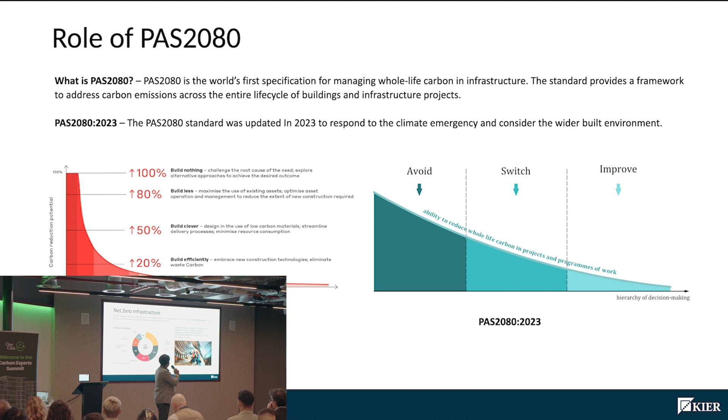If we move on to the next slide then - if we take the UK context, 75% of UK emissions are predominantly from the infrastructure sector: the roads we have, the power industry, the buildings in the country. So it's really a key sector where we need to reduce emissions, and also investment.

Nothing can be achieved without investment. A recent study found out that at least 40 billion pounds need to be invested per year into the sector for the country to achieve its 2050 net zero target, if it were to achieve it.

So that's the problem. The problem is to reduce carbon, and for that we need to achieve net zero. Infrastructure plays a key role in the UK achieving net zero and the whole world achieving net zero. So we need to achieve that.

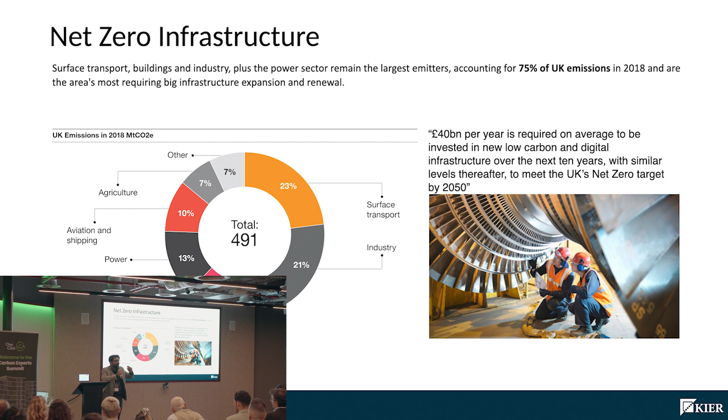Another way to think about it is we are unhealthy, we are overweight - not us, we all look beautiful here, but using a weird analogy, the whole world is unhealthy. It's overweight. There's too much carbon there, or if I were to refer to that analogy, there's too much fat in it. So how could we reduce that?

If it were us to reduce fat, to decrease weight, we go on a diet. And for the world, they need to be doing this sort of thing. Now this is a non-exhaustive list - there are unlimited solutions we could be doing, but I've just picked out a few which, at least in my mind, are significant. So: clear targets.

I generally find it very hard to drive thinking within infrastructure projects to reduce emissions or introduce sustainable solutions, because every time you go in there with an innovative product or design, the question you get back is, why waste the time, why waste the money, why waste the effort, if it's not for an actual cause.

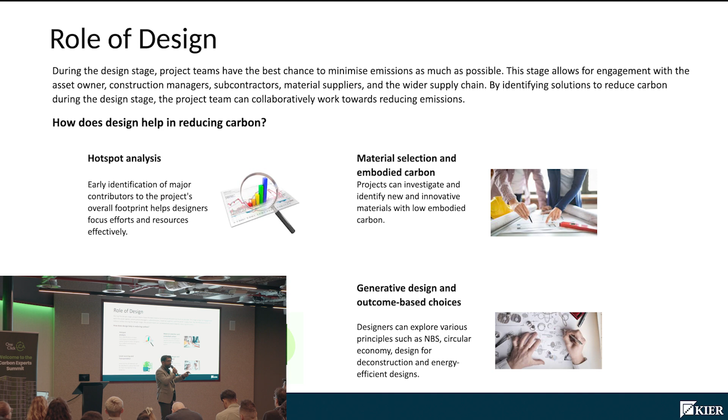Then moving on to identify other sources, so local sources and alternative sources of transportation. I recently worked on a HS2 scheme—well, I say recently, that was last year. Now, we required a lot of aggregates to be brought on site for that project. So initially, the early designers identified a quarry about 60 kilometers away. But during detailed design, we somehow managed to find a local supplier, which was just about 10 kilometers away from where we required it. Now that change from 60 to 10 kilometers saved about 10,000 tons of carbon. So that's one of the biggest impacts we could have in design, where we are able to identify these local sources of materials, which significantly reduce that A1 to A5 element of carbon.

Then generative design, which was talked about earlier by my colleagues. We could look into applying a lot of different principles, integrating nature-based solutions, applying circular economy, designing for deconstruction, where we get to look at different stages.

So life cycle assessment in design—the main benefit, as I see it, is we get to see the impacts across the whole life cycle of the project. So if I were to choose a material, I could look at what impact it will create during maintenance of that material, and what impact it will have during the end of its life. Traditionally, what I found with low carbon materials is that we found a material with very low embodied carbon. It's a great product, will solve all our problems, it comes from a local place, so it's pretty much low A1 to A4. However, it requires a lot of maintenance because it hasn't been tested properly.

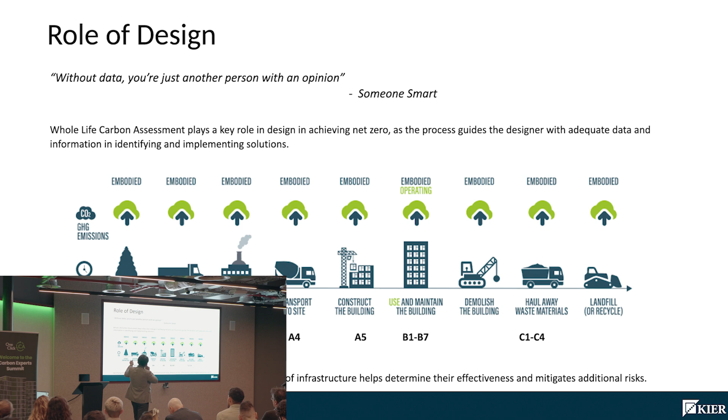And there are a lot of instances where you lower the A1 to A3, but you would find the B1 to B7 or the C1 to C4 elements of the life cycle going up. But having this perspective, where we could look at all these stages, helps us tackle carbon at a very, very early stage.

We talked about the diet and exercises we need. Combine them together, we need a weight loss plan. And that is what PAS 2080 is - it's effectively a plan we could use in our journey to net zero.

When I started in the industry, there was a 2016 version of the standard, which was updated last year to the 2023 version. There aren't many changes.

One of the notable changes was in the carbon reduction hierarchy. We used to have build nothing, build less, build clever - which I preferred - and this changed into the avoid, switch, improve hierarchy.

This principle traditionally tries to say the same story: take early action as soon as possible, before you get the shovel in the ground. Start thinking about carbon, engage with the right people, so you have greater ability during those stages to reduce carbon.

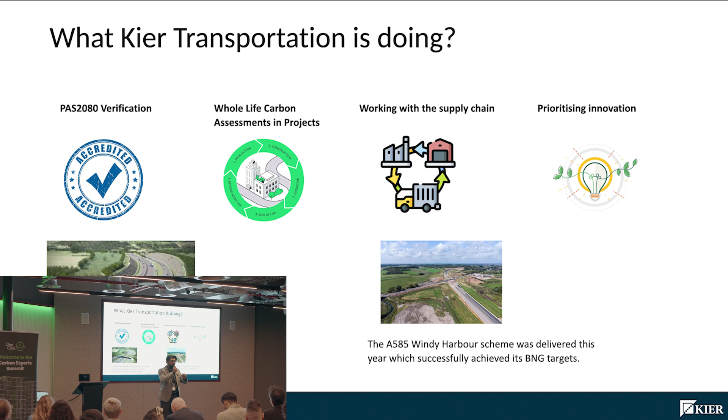Our Kier construction business is quite ahead of us in this journey. They've managed to standardize carbon assessment in most of their design, working with their designers to integrate that into their design process. We are taking a similar journey in transportation, working with our design team. I'm part of Kier Design Solutions, where we try to integrate carbon assessment into our design process so it becomes a standard practice when we deliver infrastructure.

Working with the supply chain has been going on for a while, but we've taken great strides. We now offer free training to all our colleagues within Kier Transportation and to our contractors as well. Prioritizing innovation, we have multiple working groups within the company collaborating within Kier and with the industry to identify innovative products so we could drive down emissions.

Some recent achievements: where I'm from, in Gloucester, there's the A417 Missing Link project. Applying the principles of PAS 2080 where possible, and trying to look at carbon from an early stage, we were able to achieve our carbon target of 35% reduction against the baseline on that project.

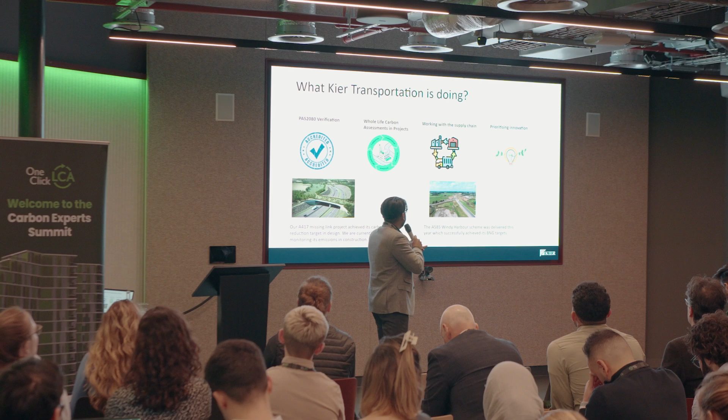This is a staged process that we are trying to implement, taking each stage of a construction project and bringing in elements of carbon, so that from the very first stage we've got carbon within the contracts. We're talking to designers and our supply chain about carbon as early as possible. At the moment, we're going through the process of integrating these into our projects.

We get onto projects at different stages. In some instances we'd be coming in at stage 3 and 4. In those instances, we try our best to ensure these steps are carried out so we can still go along this sort of journey.

The key processes within this carbon management process would be baselining, having a target, and conducting an assessment, because numbers drive attention and we need numbers to reduce. Then engagement is a big key for us.

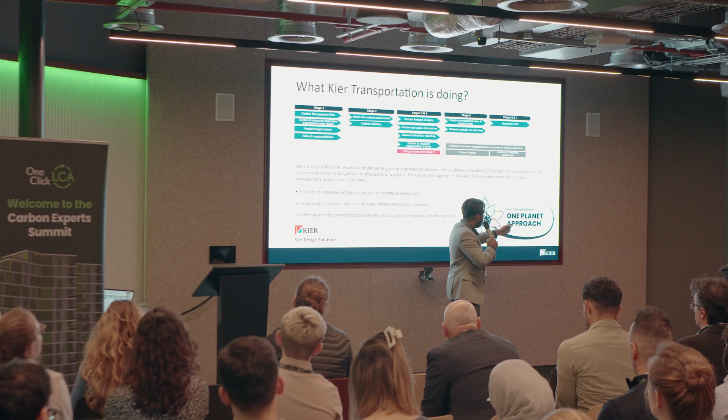A lot of our engagement is run through Kier Transportation's One Planet approach. If you look at the Kier website, there's a Building for a Sustainable World approach, taken by the whole group, which then trickles down to the different divisions where they create their own version of it. This is our approach.

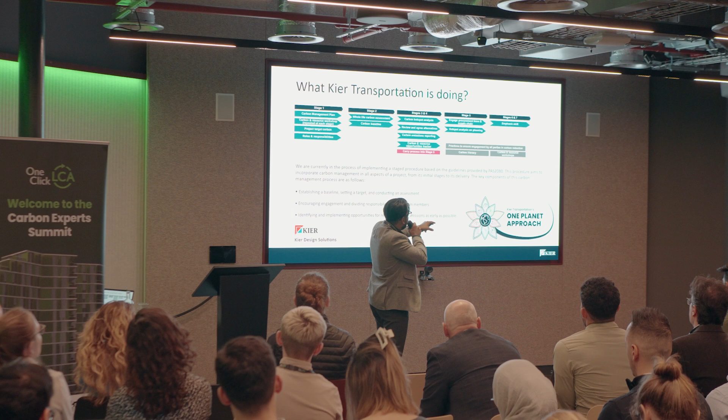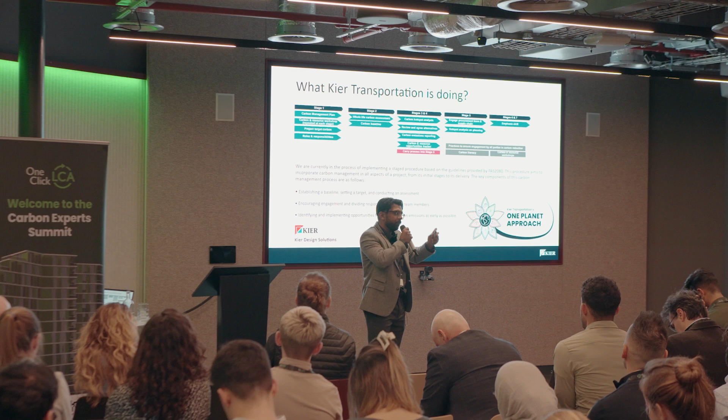We integrate these two things to deliver sustainability within our projects. Kier Design Solutions is at the forefront of delivering this work within the transportation business, as I said, where design is key.

Now, where One Click fits into this: the first element where we need to do baselining, target setting, and assessment is delivered via One Click. We use the platform across a lot of our projects, including major projects, to do the baselining and the ongoing assessment through every stage.

The process has been going well so far, but there's a lot of work still needed, as the industry is also playing catch-up. Our clients, such as National Highways, Network Rail, or Transport for London, are all playing catch-up in this process. What we're trying to do is work with them to understand their process and find uniformity, and also offer the software solution where we could come in and do these assessments in early design for them.

So that's how that's been delivered, and hopefully you've got a feel for how net zero infrastructure is being achieved. There's a lot of management involved, but we can't achieve net zero without a streamlined carbon management process. That's my presentation—if you have any questions, let me know.